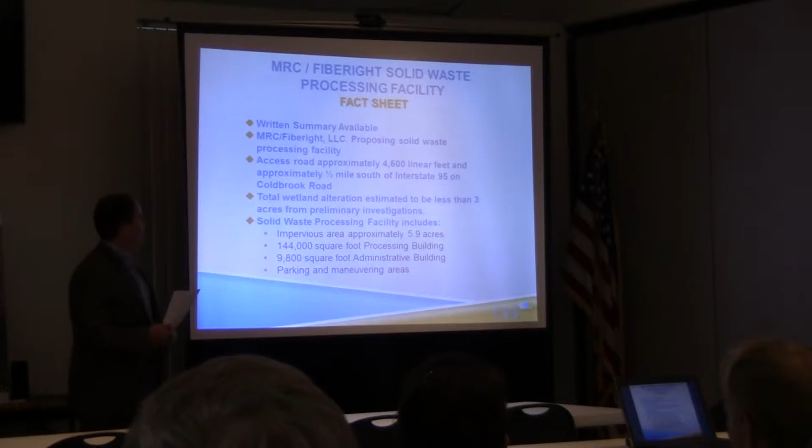As I said, this is a proposed solid waste processing facility. It's a co-applicant of the Municipal Review Committee and Fiberight LLC. There is a... jump ahead for a second, one more ahead.

As part of this project, there's a new access road off Coldbrook. I'll back up and put it in context. This is I-95, this is Coldbrook Road. The large Dysart's facility is on this side of the highway, H.O. Bouchard is on this side. This proposed new road uses an existing gravel road across some fields into this area, which has been zoned industrial by the town of Hampden.

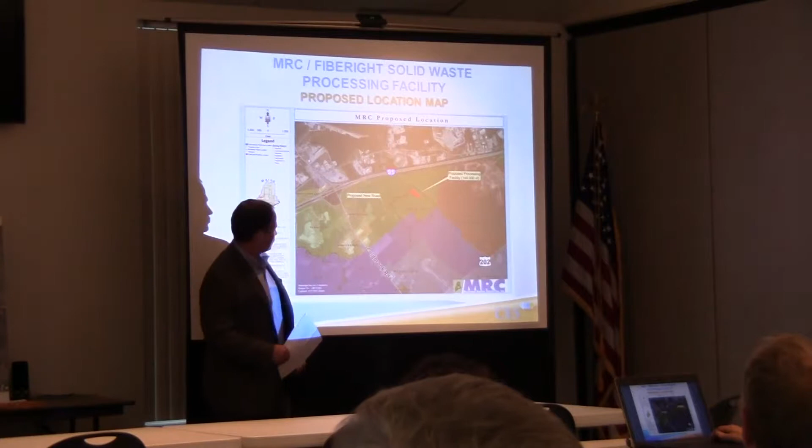The town has a comprehensive plan where they've mapped out land uses. You can see the green zone here, that's industrial. The yellow is an interchange with the highway. The purple color is a rural zone, and there's a residential zone down here. There's also another industrial zone - this is an Ameco park over here.

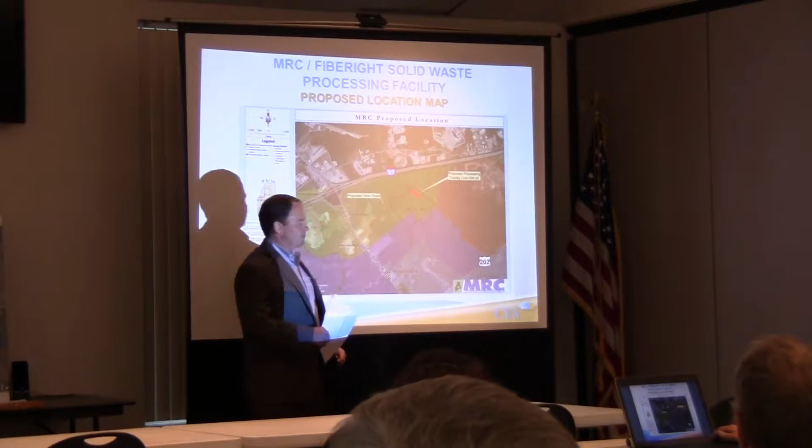So this road is about 4,600 linear feet in length, and again, it's going to be using the existing gravel road. There's a proposed facility - a building location that's 144,000 square feet. If you can back up 2 slides - that new road is about a half mile from the interchange of the highway.

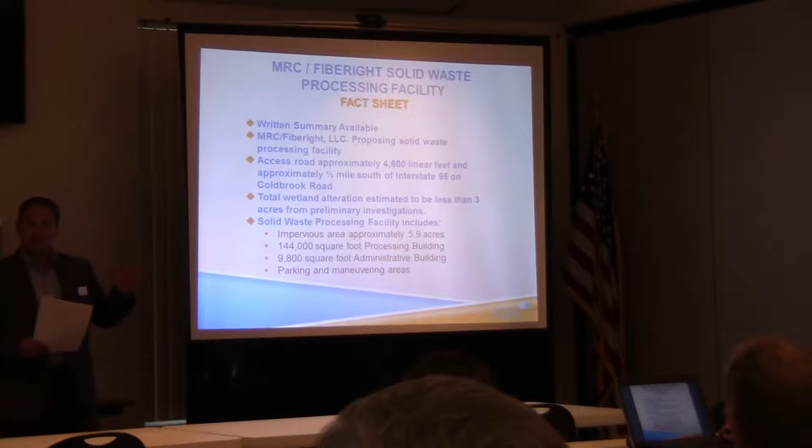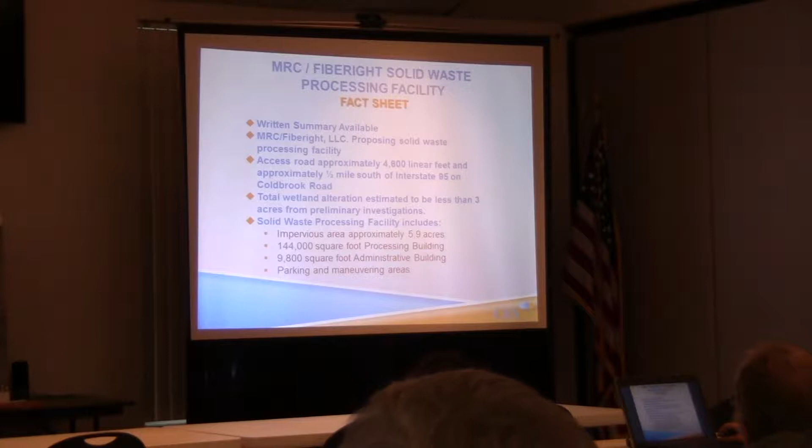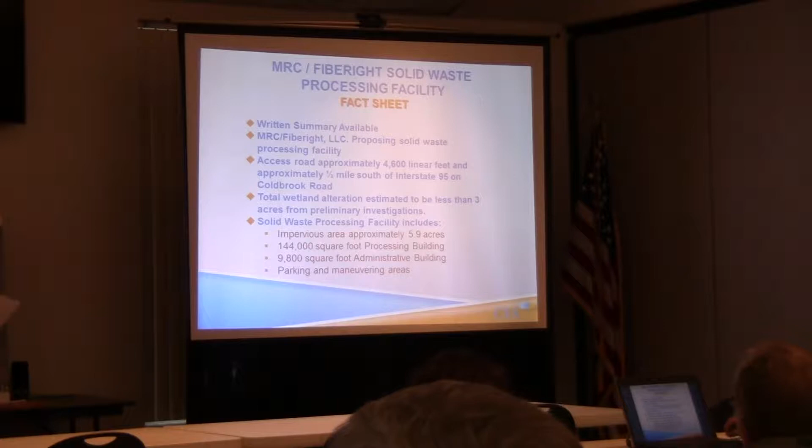The total wetland alteration we're looking at for this project is somewhat less than 3 acres. Through development projects, we're required to avoid and minimize as much as we can, and you'll see on the site plan we've done a good job of avoiding and minimizing those impacts.

The total impervious area associated with this facility is 5.9 acres. As I mentioned, the building footprint is 144,000 square feet. There's another associated administrative building attached, that's 9,800 square feet, and there's also the parking and maneuvering areas around the facility.

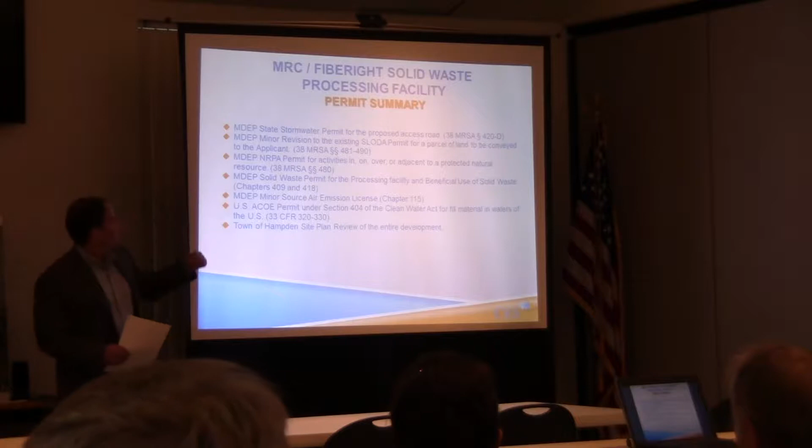The first permit on the list is for the proposed road, and associated facilities with that road require what's called a Chapter 500 stormwater permit.

The second license on the list is the Site Location of Development Act, or SLODA, for transferring one property to another—the property owner transferring a piece of the property to the MRC.

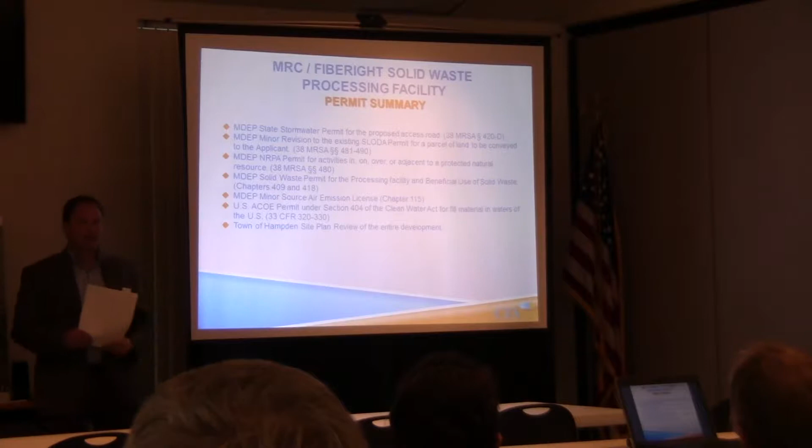The third permit is called the Natural Resource Protection Act, NRPA, which has to do with protected natural resources, wetlands, and vernal pools. This project is somewhat unique—we're doing that NRPA permit for the road, and separately for the processing facility.

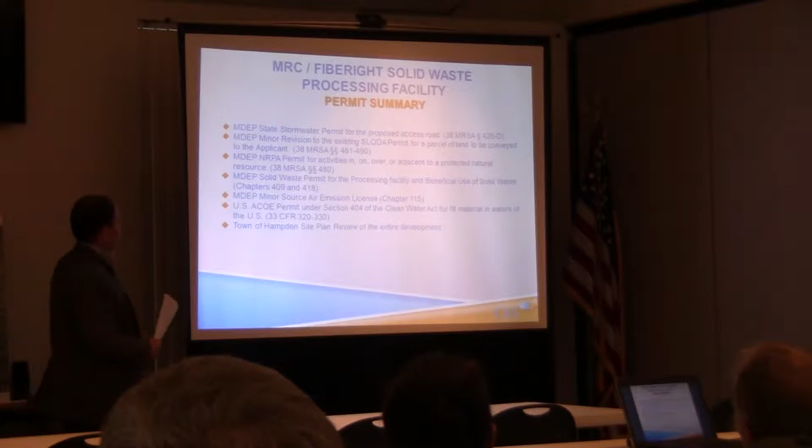The solid waste permits required are both under Chapter 409, which is processing, and Chapter 418, which is beneficial use. As we'll talk about the processing, the end products are going to be beneficially used. There's also going to be a minor source air emissions license required for the processing facility.

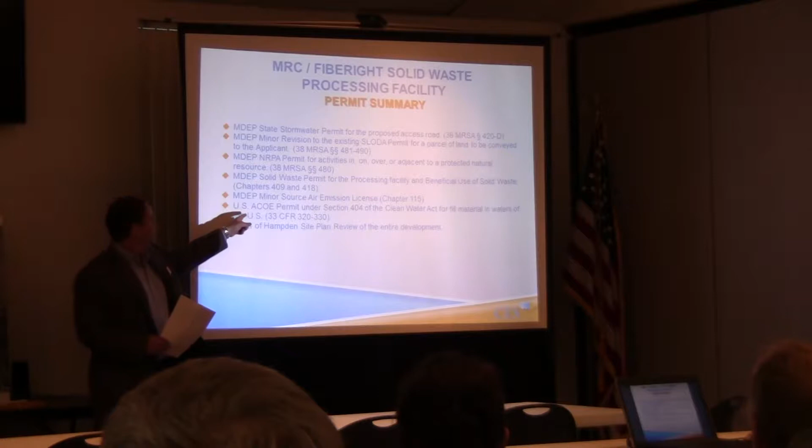There's also an Army Corps of Engineers permit under Section 404 of the Clean Water Act, another level of permitting we need for wetland impact. So it's really a federal and state duplicate there.

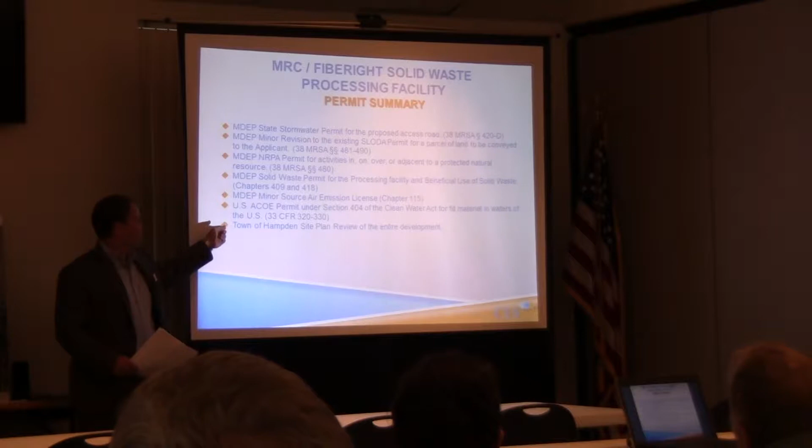And then the last one on the list is the town of Hampden will have a site plan review process for the entire project—both the site plan for the facility and the road will go through the town approval process. So as you can see, there are several permits.

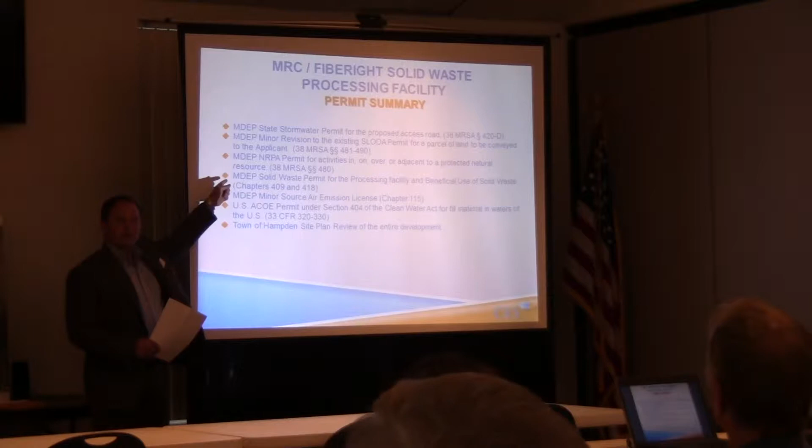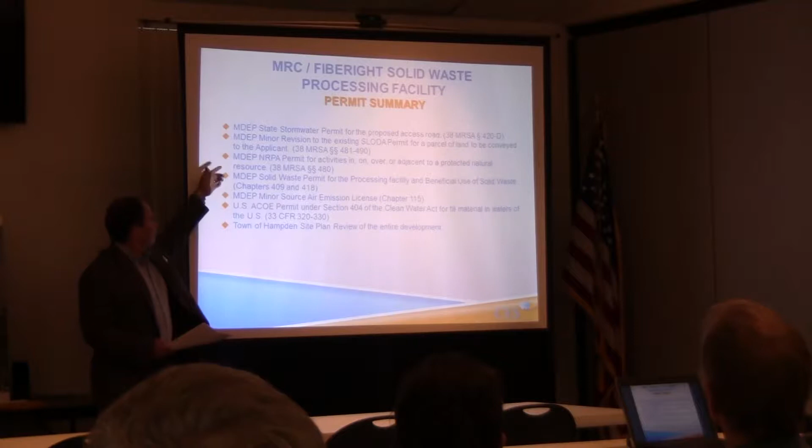The timing of these—the solid waste permits take the longest time for approval. The DEP, the Department of Environmental Protection, has a year's worth of review process on that type of permit. That's coming in to the DEP mid-month, this month, mid-May. All the other permits will follow about a month behind.

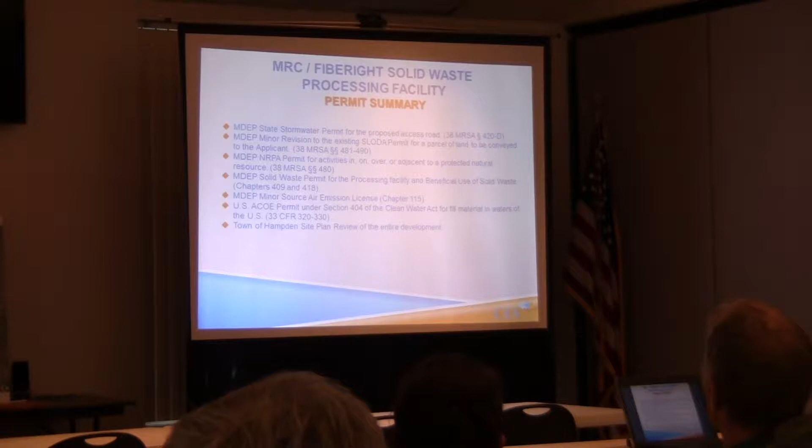In the state of Maine, we have vernal pool surveys that must be done in the spring, for certain frogs and salamander eggs—we inventory the project site before a project like this. That's happening right now, and we'll be submitting probably mid-June on everything else.

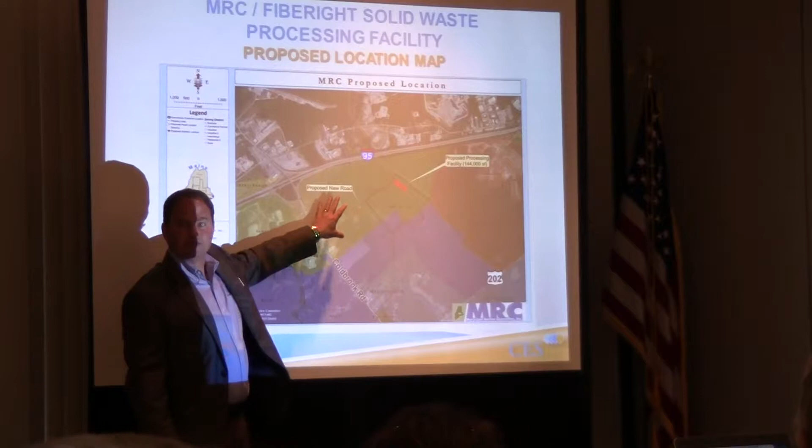This is the overall aerial photo of the area. As I mentioned, this area was targeted because the town is interested in a project like this. It's consistent with their comprehensive plan, and it is zoned industrial, which is what we need for this type of project.

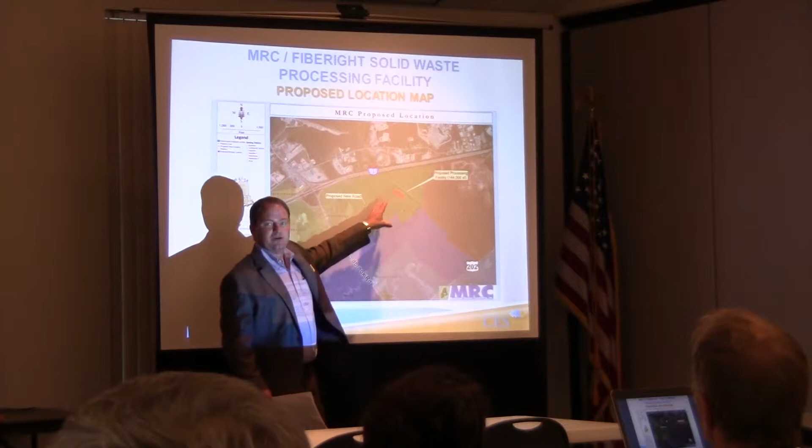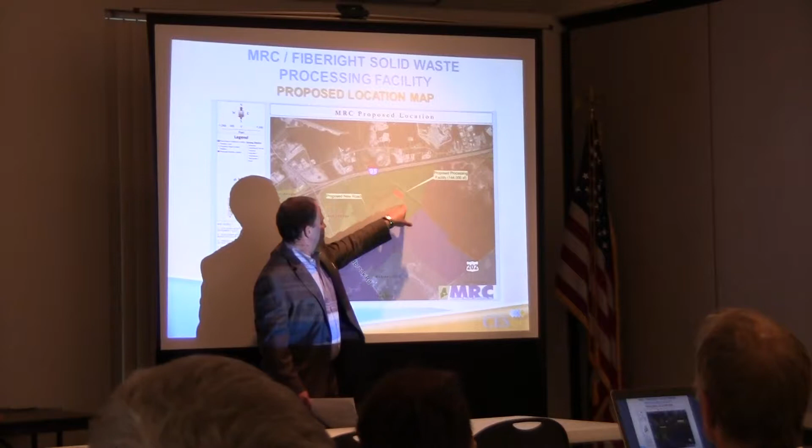This dark boundary is a proposed estimate of the property boundary for the facility. MRC is acquiring a lot more property than it needs. We'll zoom into the site plan in a little bit, but the property that's utilized is up in this corner.

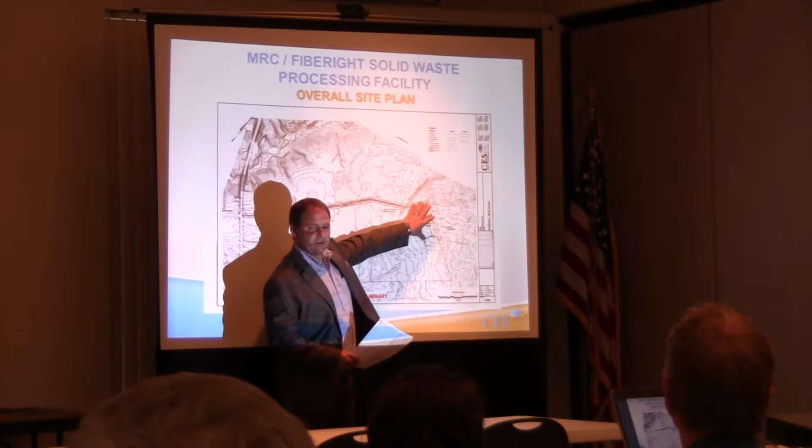Here's another overall site plan that shows the actual alignment of the road. It shows the wetlands in this dot matrix figure. You can see there's standing water out here, but as you approach the facility it's more of a forested wetland. This area up here is all upland, and we fit the facility in there the best we can to avoid and minimize wetlands.

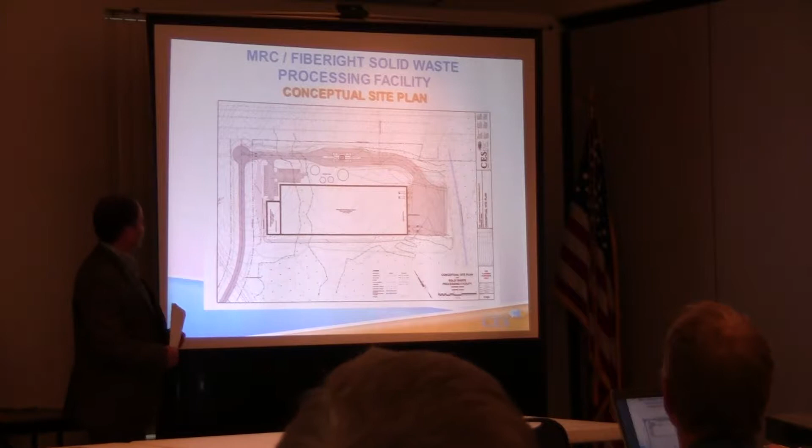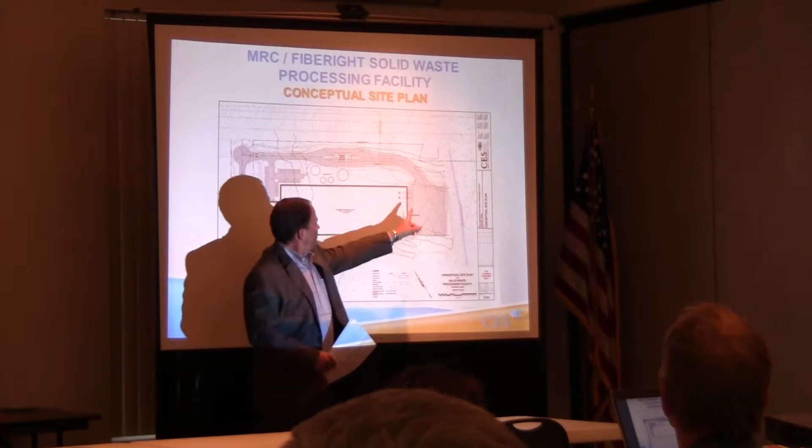Here's a zoom-in of the actual site, showing the new road extension and the driveway in with a scale and scale house. This is the front facing the new road. Trucks will drop off the waste inside the building, and there'll be a loading area on the other side of the facility for the exit. This will be the employee parking area and administrative section of the building.

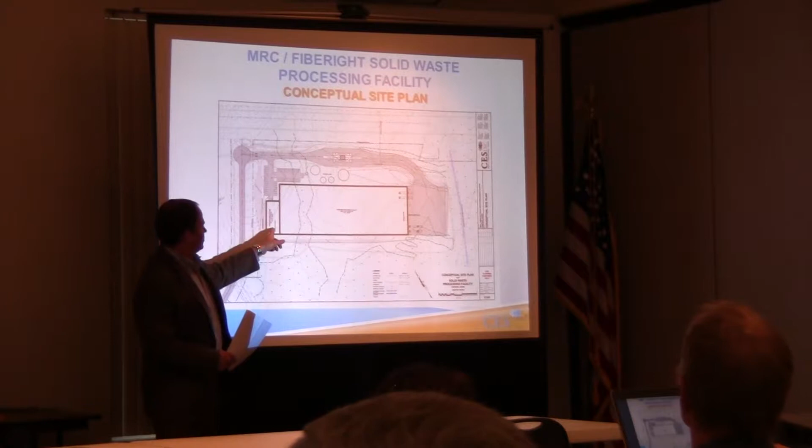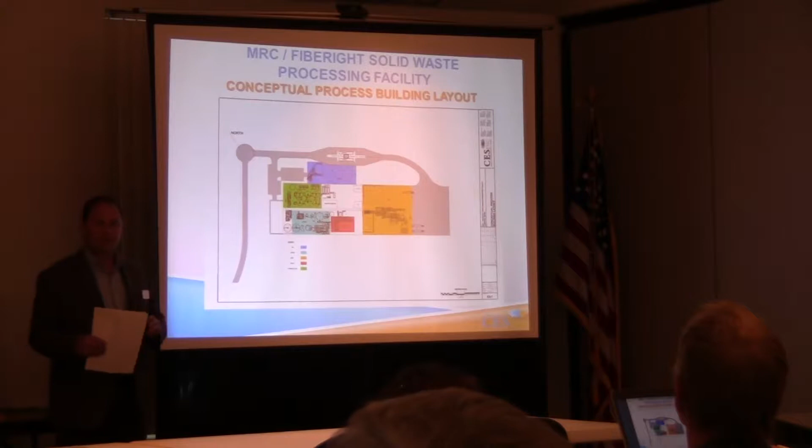This figure shows the different components inside the building. A lot of times at these meetings we don't get into the inside of buildings, because that's not necessarily part of the permitting process. But this is a processing facility that needs a solid waste license, so let me come over here to show it better.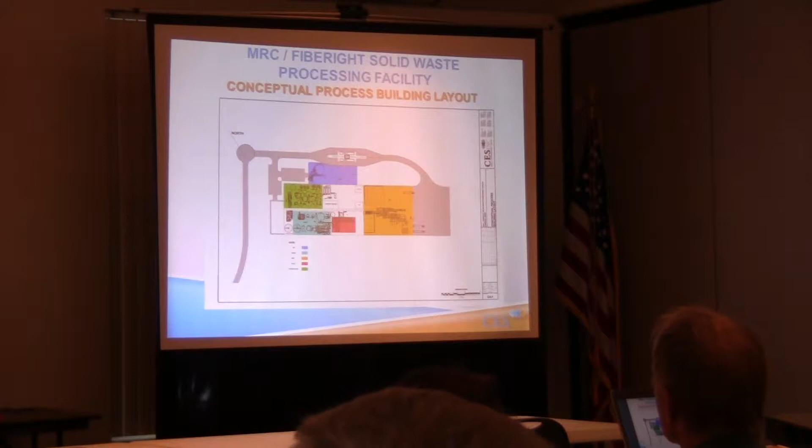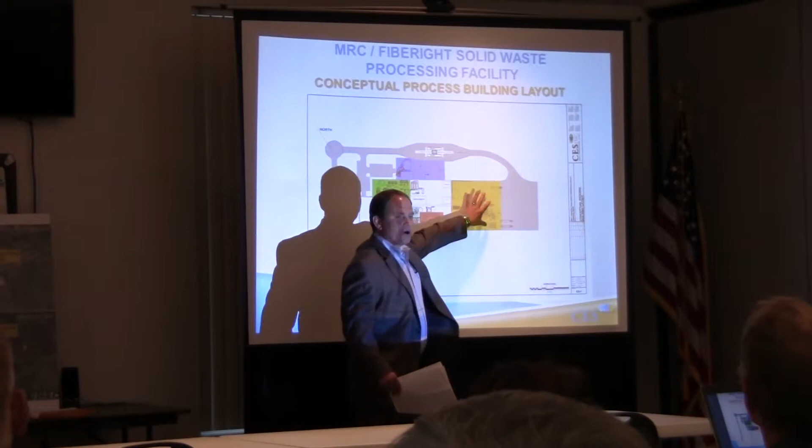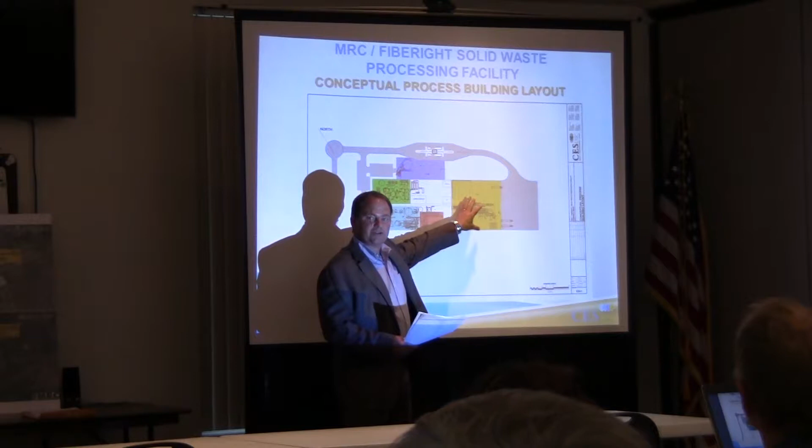The green section is referred to as the hydrolysis section. This light blue-green color is the washing area. The yellow is the material separating part of the facility. When the waste comes in, this is all the mechanical separation part, where waste is processed and divided into components for further processing. A lot of recyclables that don't make it through the local recycling process will be captured on the upfront part of this facility.

The pink area is the pulping process, and the darker blue is the anaerobic digestion tanks.

At the last public informational meeting, there were some residential concerns about prevailing wind direction. So this time I came with our research showing prevailing wind direction in this area, sourced from Bangor International Airport.

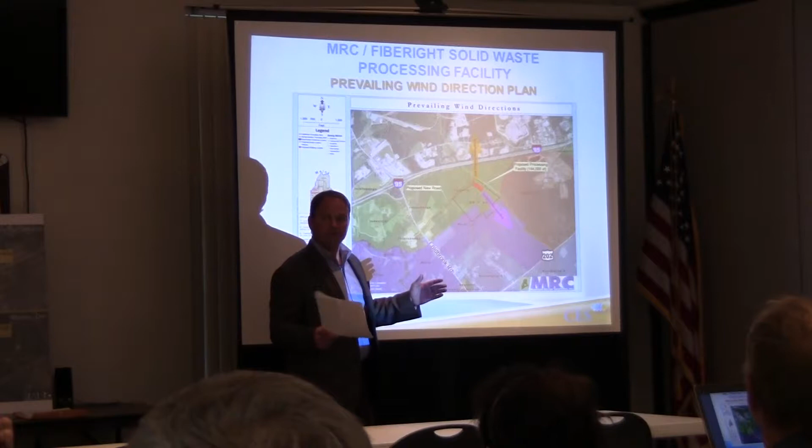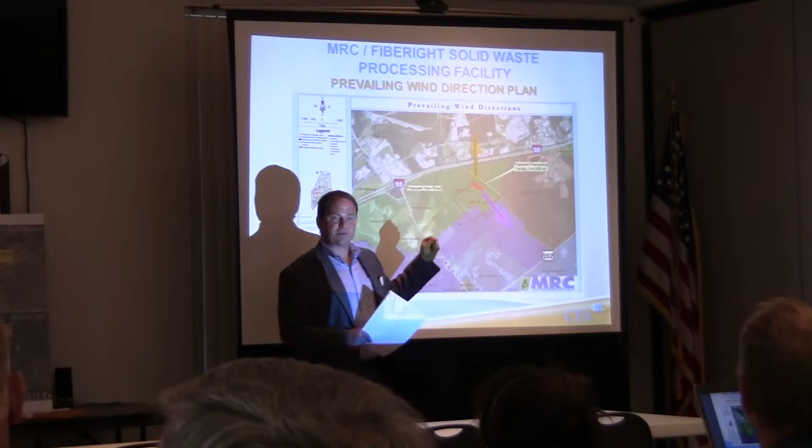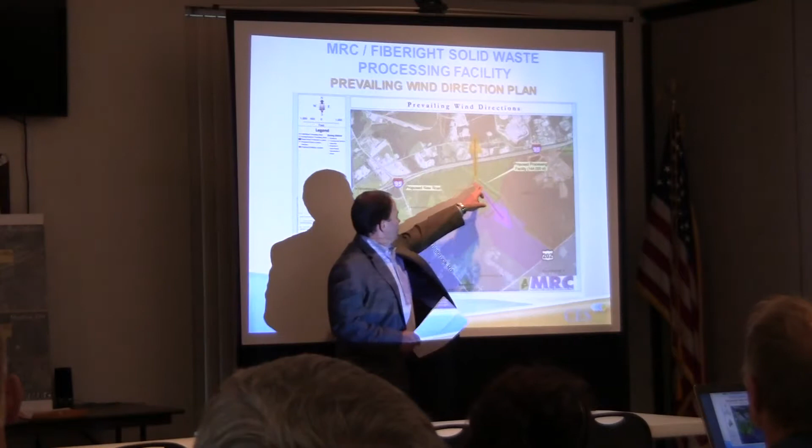There are actually two prevailing wind directions: a summertime and a wintertime one. This bluish-purple arrow comes from the northwest to the southeast, which is the fall-winter prevailing wind. The yellow arrow is the spring-summertime prevailing wind direction, coming from due south to north. This red box is the facility itself where all the waste is processed, and I think this may help address some concerns based on the prevailing wind direction.

All right, Kyle, do you want to talk about air emissions real quick?

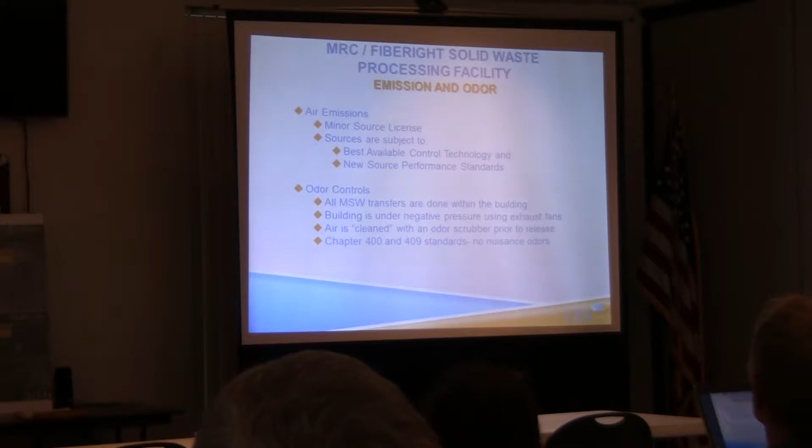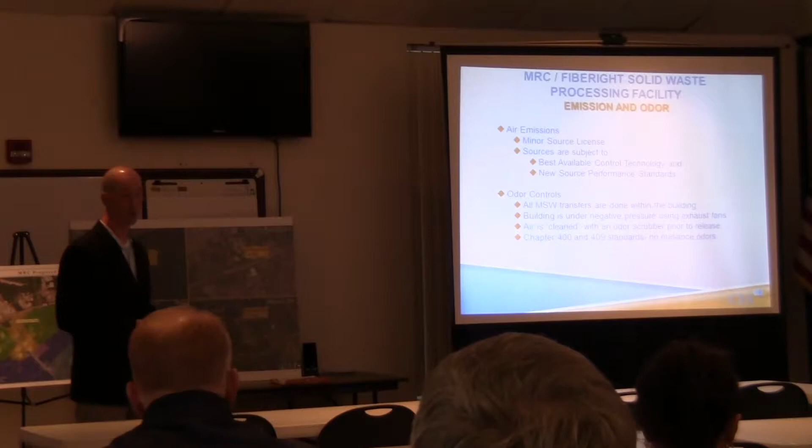Just to touch briefly on the air emissions and odor control for this project, the source will be licensed as a minor source, defined by DEP and their licensing rules. All sources are subject to DEP and EPA's best available control technologies, as well as new source performance standards. There's a ton of those, and we're still sorting out which ones we'll fall into.

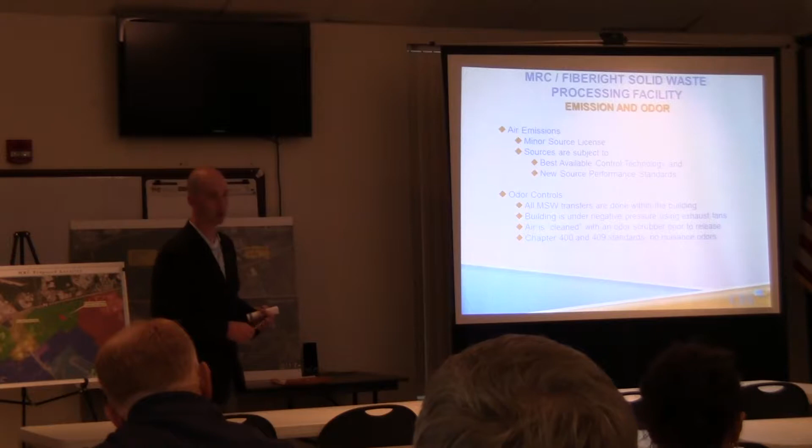Then the odor control, which I know is a big one. In this project, all transfer operations will happen indoors, and the building is maintained under negative pressure. We'll have a fan set up that draws a considerable amount of air into the facility. That air is then treated, going through a scrubber designed to take out the organic components of the gas to reduce any odor coming from the facility. The DEP will not license the facility under Chapter 400 or 409 if there is potential for generating odors, particularly nuisance odors.

And that's pretty brief, but yeah.

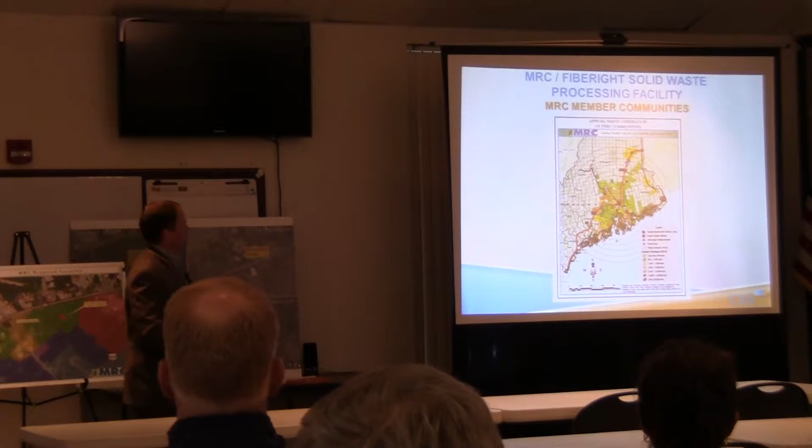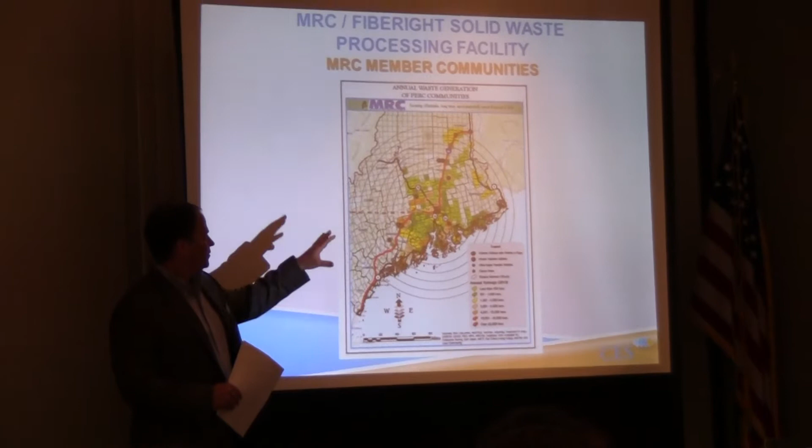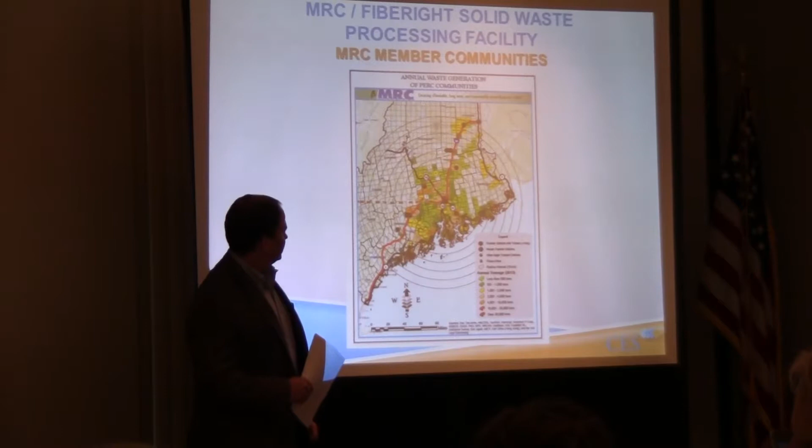This slide shows all of the communities that are part of the MRC that have brought waste to the PERC facility across the river, and those are the target communities for this project. As you can see, it ranges down to the coast, up into Aroostook County. There's 187 communities that currently bring waste to PERC.

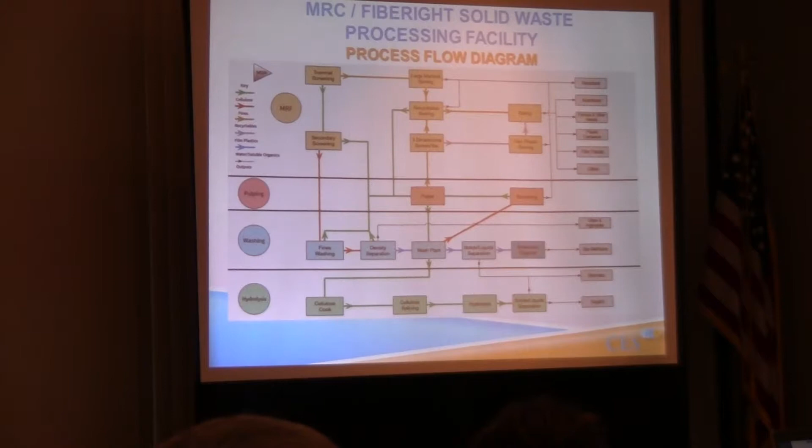So this gets into the more technical details of the processing facility inside the building. Depending on the questions you may have on the details of the processing, we'd like to set up a separate, more detailed conversation as an opportunity for people to ask questions about the processing facility.

So it's really a summary level that I'm giving now, and what we'd like to do is offer another meeting, May 19th at 7 o'clock, and we'll make sure we notify those who are interested. Maybe we can use our sign-in sheet to identify whether you'd like a separate invite to that meeting at the 19th at 7 o'clock. If you have detailed questions you'd like to submit ahead of time, we'd like to get those by the 13th of May.

Another idea for helping get input from communities that may have concerns: we'd like to maintain a frequently asked questions list and make that public, continually adding questions and concerns we receive, and hopefully publishing answers as a way to get input to our project. I think the MRC and Fiberight are very open to constructive input on their project.

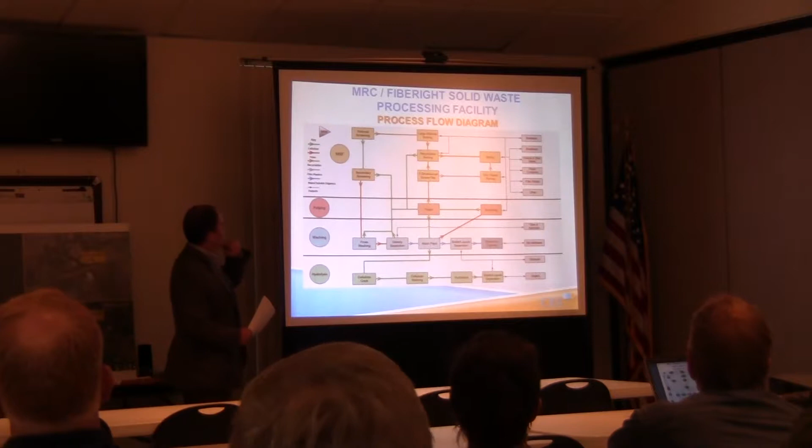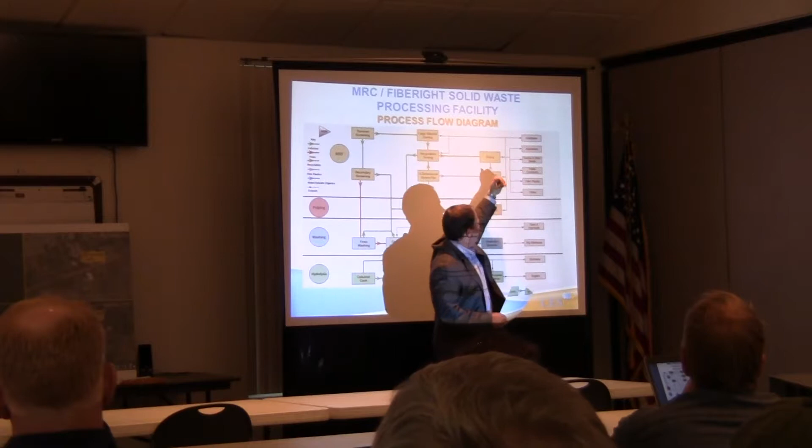So back up a second and go over the process flow diagram here. At the top, in this yellow or mustard color, is the mechanical separation of waste process. Then these are the end products over here that are recyclable: aluminum, residuals, ferrous and other metals, plastics, film plastic, and others that will be recycled.

Then for the material that proceeds to this second, pink colored section, there's a pulping process that processes the waste, then a washing process, and then the hydrolysis process. So it's a very technical process, and that's why we thought a separate discussion to get into all the technical details would be better.

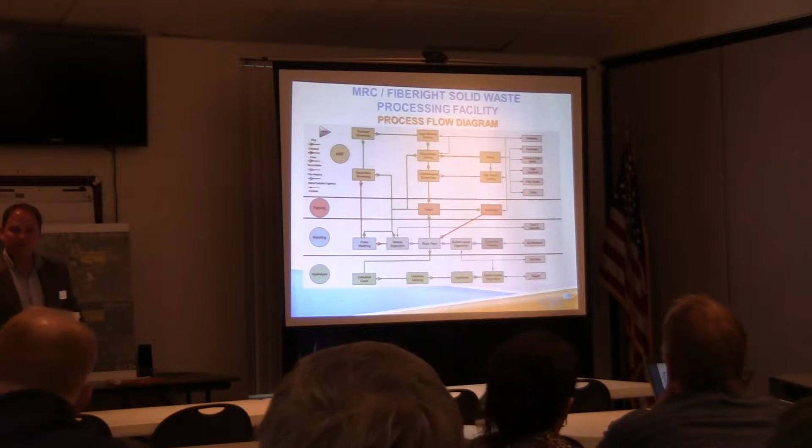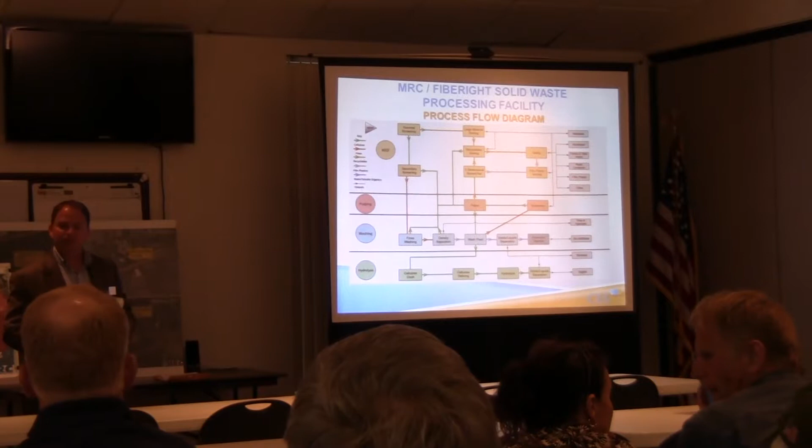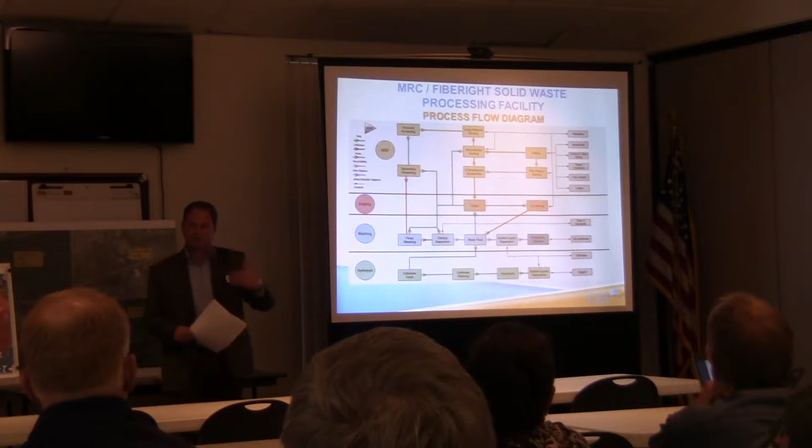This process has been submitted to the University of Maine Chemical Engineering Program. The professors at the university have done a peer review and concluded that all of these technologies exist and are proven technologies. That's one of the comforts the MRC has, that we're not proposing something totally new here. It's all proven technology.

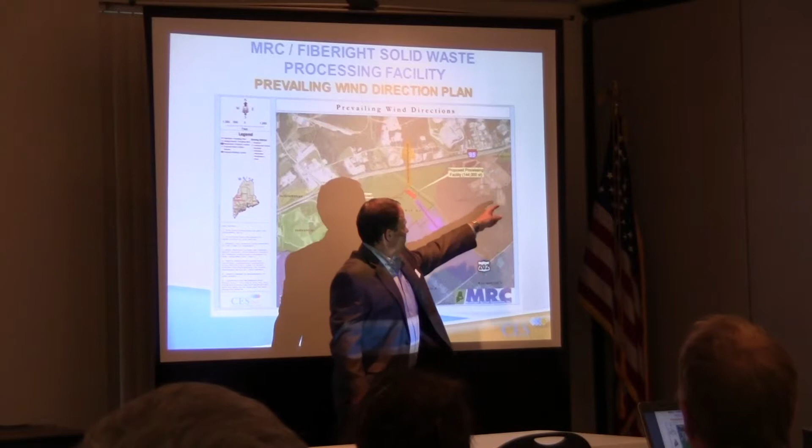Adequate provisions for utilities. As part of the project, there's no water and sewer on Coldbrook right now, so we evaluated whether or not to connect utilities down here or across over to here. The town's preference, as well as it just made more economical sense, to connect it through here, so we're also extending utilities out that way.

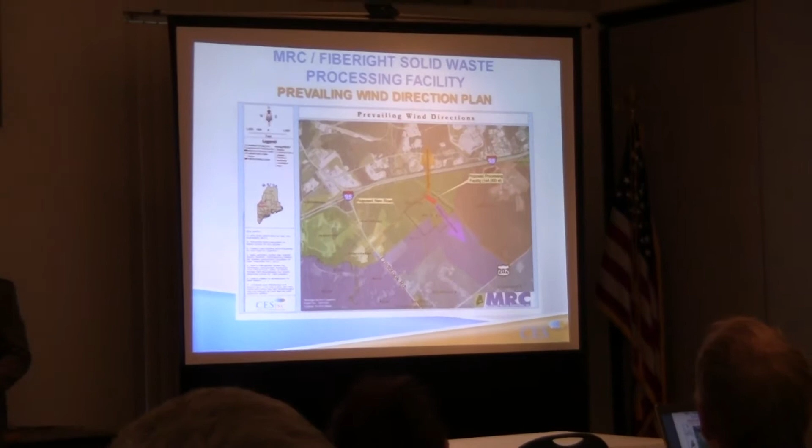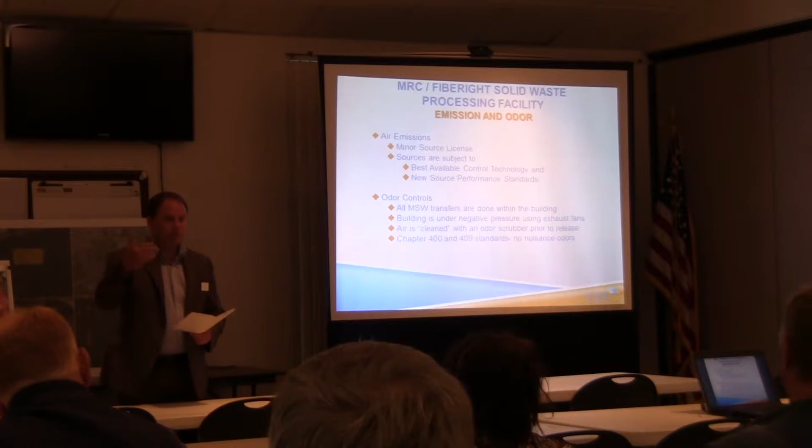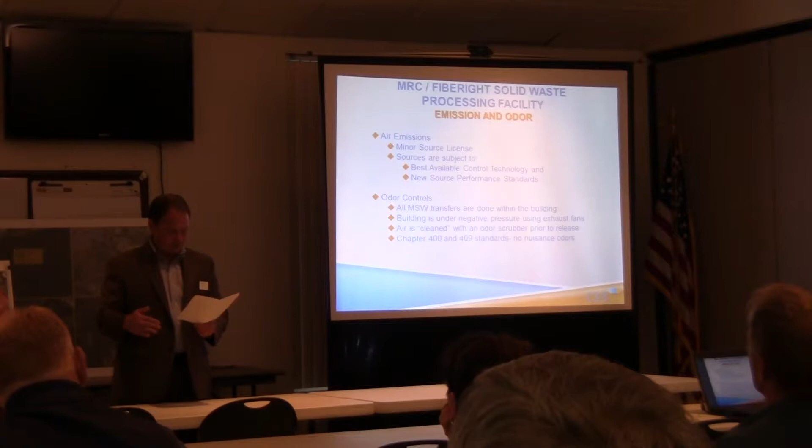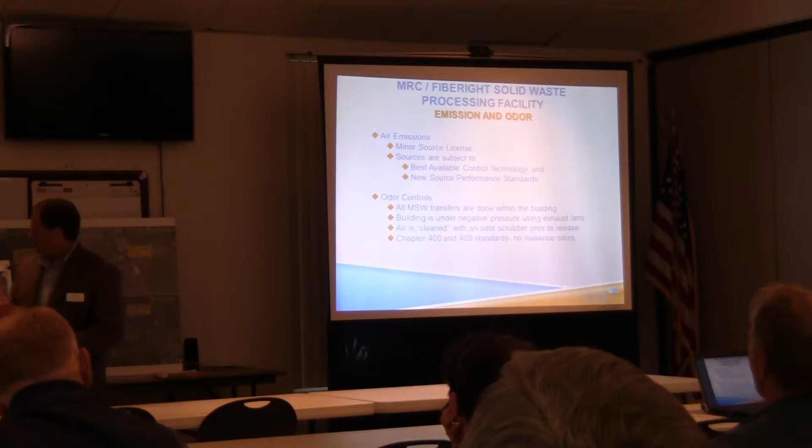There's also a solid waste management hierarchy. For those that paid attention in Maine, there's been a lot of discussion about following the hierarchy. There's a state statute that provides all of the priority on waste management in the state of Maine. You're supposed to evaluate the methods of waste handling and try to follow this hierarchy to the best you can. So reduction has the highest priority, then reuse, recycling, composting, processing, and finally land disposal as the last resort. We'll do a detailed evaluation of compliance with the hierarchy, but I'm going to summarize a bit here.

There's a lot of local recycling being done, a lot of reuse and reduction of waste locally. This type of project is not going to deter those local systems from succeeding. It's really just going to be another take at reducing and reusing waste. I talked about the front end of the mechanical separation and getting all the recyclables out the best we can.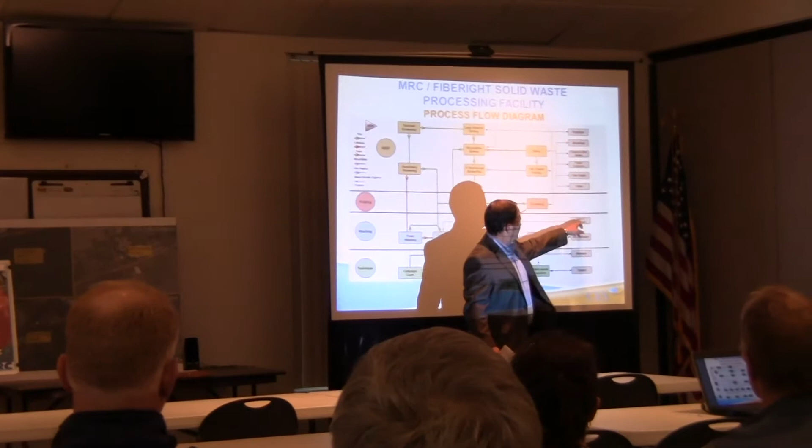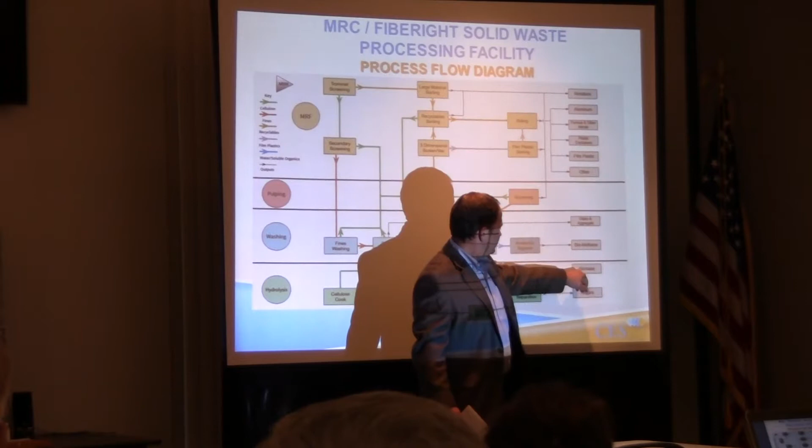And then we're going to be making products. Can you go back to that process flow? So again, there'll be some glass and aggregate that's captured that won't have to necessarily go to the landfill. There's going to be a gas component that's going to be put back into a gas pipeline, and then there's also biomass that can be used as fuel, and industrial sugars that can be marketed.

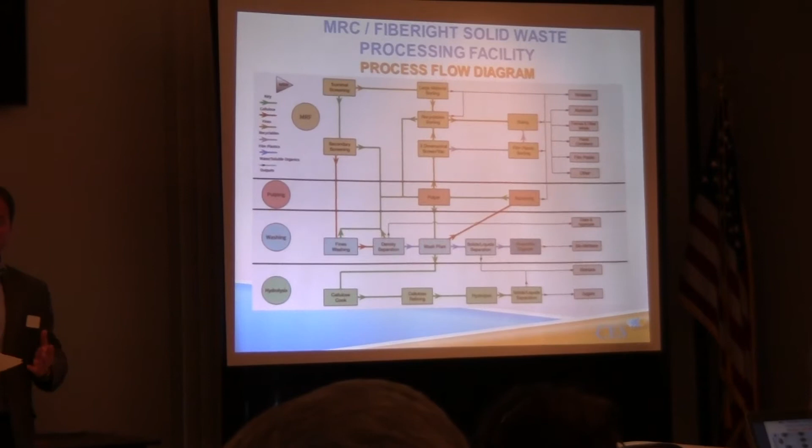So the overall success rate of this project is actually pretty incredible. If you've looked at different systems across the state, it's probably achieving the highest diversion rate from landfills out of any project that I know of, and it's going to achieve about 80% diversion. So we feel like the standards on the solid waste hierarchy are going to be achieved upfront more than other projects in the state.

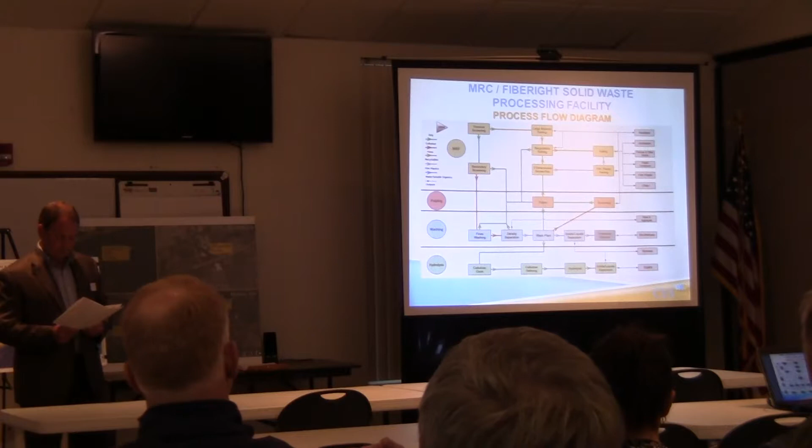The last little bit is this handout. It's double-sided, and it's a required component of this meeting that we just inform the public that this fact sheet exists, and there's all kinds of opportunities to provide input on the permitting process. This public informational meeting is mentioned on the first page as 2A. We're going to be filing the applications in the timelines that I mentioned.

If you're an interested person, there are many components. It starts on the first page at the bottom and then goes on to the second page, but there's several. You can submit comments directly to the DEP. I know that the MRC and Fiberight are very interested in getting your comments, so we want to maintain a set of frequently asked questions, share feedback, share comments, suggestions. There is a provision in here to ask for a hearing to the DEP. There isn't an automatic hearing for a project like this, but you can request that.

I had mentioned you can submit comments directly to the department, and then there'll be a draft order that will be available to the public. I think that concludes it. Is there anything, Greg, that you wanted to add before questions? No, I think it's time to jump into Q&A.

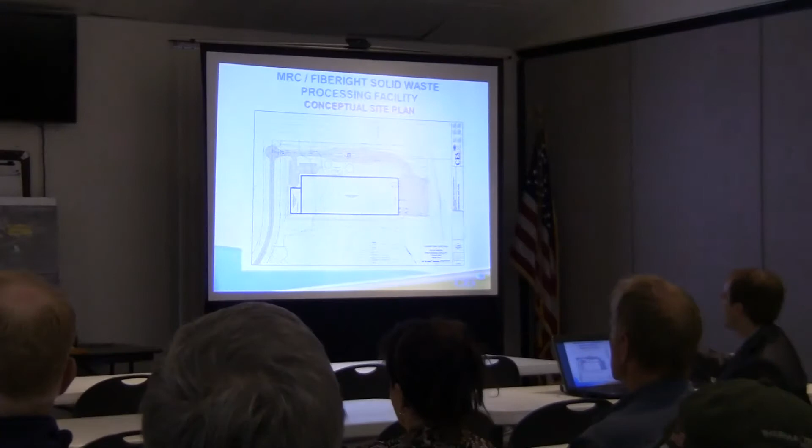Any other questions? The building design, so the trucks go in on the top, around the yellow, to the right of the yellow. Then they turn around in the building? No, they go into the tipping floor here. The different types of trucks will unload and then pull back out. So this area is the unloading area inside the building.

You wonder, do they drive out versus back out? Yes, that'd be drive out. So they back in and drive out. They pull into the building, back into the building.

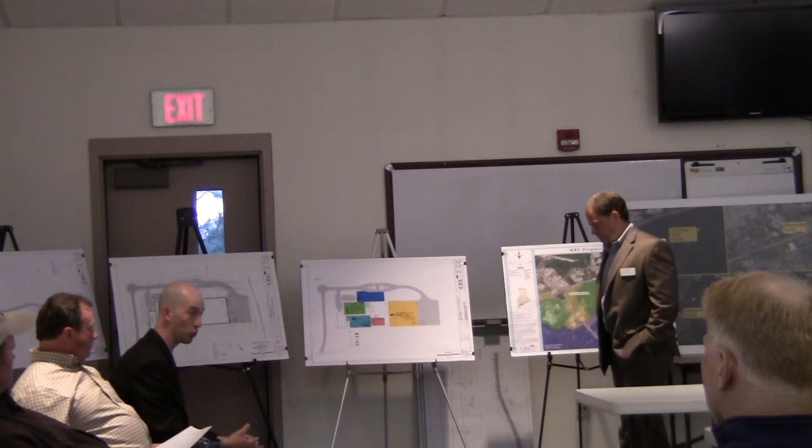And so it's supposed to be totally self-contained, right? So how do you keep it self-contained when you have vehicles going in and out? What they're going to have set up is, under normal conditions, when the doors are closed and the building sealed, they have a single exhaust fan running. The doors are interlocked to a second fan, so as soon as the door is open, another fan kicks on, which increases the amount of passive air moving through. Anything that's inside the building is going to stay inside the building.

In fact, some of the things around the outside, as far as air goes, will be open, creating a vacuum so the airflow across an open door is only inward. So the trucks, when they go in, they're all the way in, not halfway in and halfway out. Something closes behind them.

Hey Dennis, first, thank you both for coming and allowing us to ask questions. So we all have a lot of questions, I'll just ask one. You mentioned odor and such, but I didn't hear anything mentioned about decibels. So my question is, what is the decibel level currently at the PERC plant existing in Orrington, and what is the decibel level of this proposed facility?

Let me talk about the proposed facility, and then I guess Greg can address the PERC plant question, because I don't know the answer to that. The decibel level... plant personnel might not, I don't recollect it.

But the PERC plant is literally spinning a turbine, right? Yes, it's generating electricity. Because I can hear that at 109 Kenneth Road at night, and I'm across the river. But this doesn't have a turbine. PERC does. Right, so with that being said, any processing facility has noise associated with it.

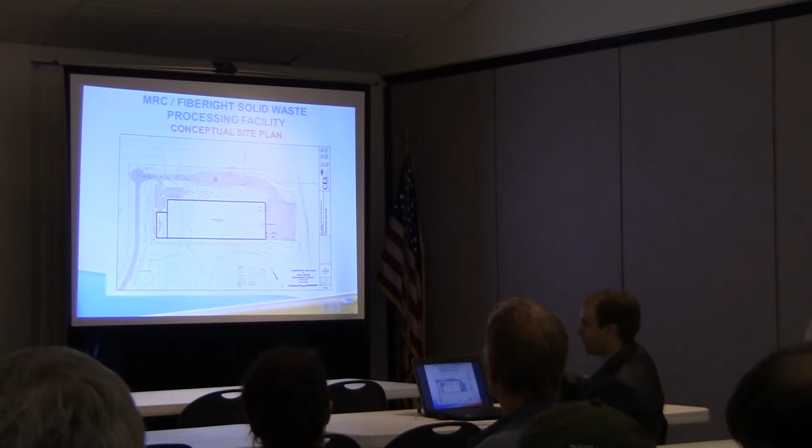Can you give a comparable, what's a comparable 70 decibel noise? 70 decibels would be a fairly loud conversation between two people close together. The other thing to take into account is the separation and the wooded area around this facility. As a rule, for every 100 feet of wooded area you have, you lose between 5 and 8 decibels of noise from that source. We've got over 3,500 feet between there and the closest residential area, and it's all wooded.

Any other questions? Your last meeting, you mentioned how many trucks are going to be going through there a day. I didn't write it down.

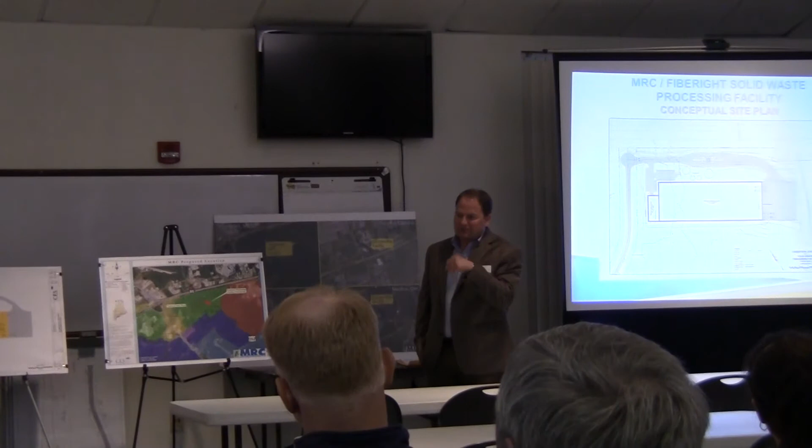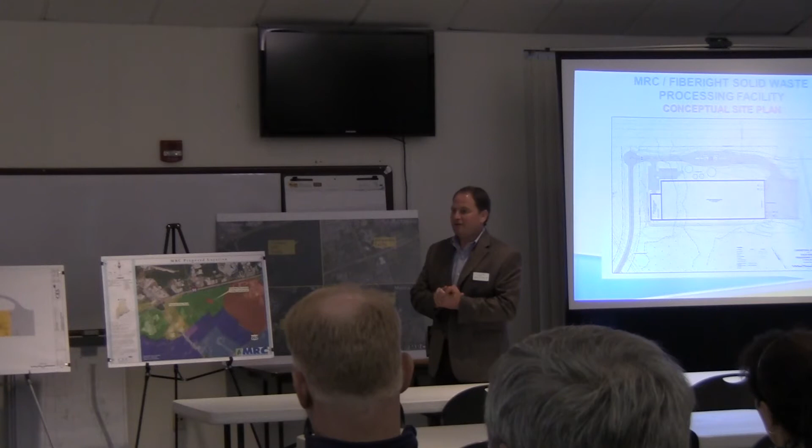I think we didn't mention the number of trucks, but someone in the audience did some quick math and tried to calculate it, but it wasn't straightforward because there's 3 different sizes of trucks. So we're looking at 60 trucks per day delivering waste, and about 4 trucks per day removing residuals. They're loading residuals, so we're talking about 65 trucks a day.

And then the employee traffic, we're required to look at peak hour, and the peak is going to be the employees, so when changing shifts. The good news is all the jobs associated with it. Is it a 24-hour operation? I think he said it was. Well, it operates 24/7, but the processing will be done on 2 shifts.

Processing will be 2/3 of the time, no processing during 3rd shift, so no trucks coming in during 3rd shift, very soon. All the trucks will stop coming well before the 3rd shift started. I don't know that we've settled the final hours of operation, but if we roughly follow what has always worked around this area, I think we'll be looking at roughly 6 to 6, about 5.5 days a week. Maybe that'll move a slight bit, but that's the neighborhood we're in right now.

Any other questions? So you mentioned that you're going to install a new water line that's going to service the facility. Yes. So my question is, with this new facility, do we have current capacity to service it with water? And will you need a pumping station to boost it, and if so, where would that be located?

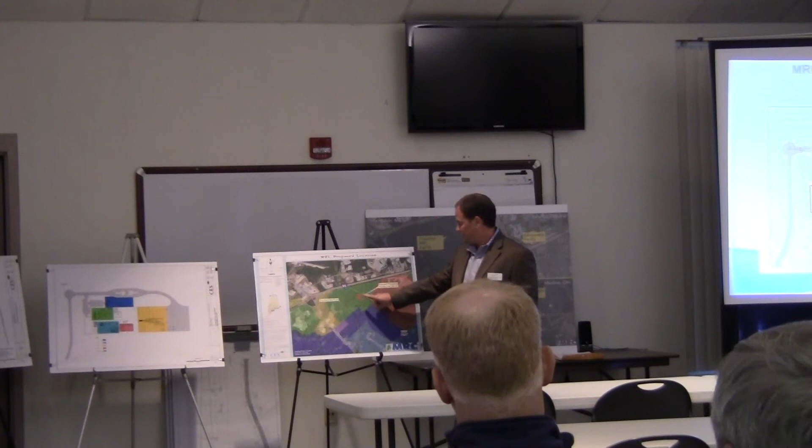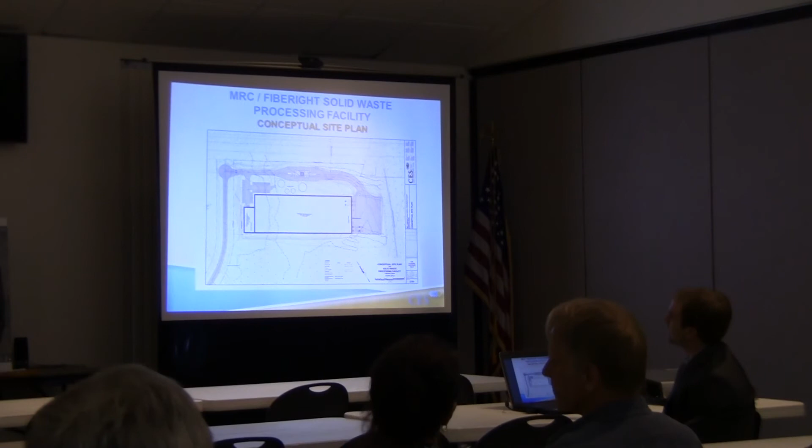Question about how to get the water from here — is there a need for a pump station for water? Good question. There's a tank currently in Hamel Park there. We've got to ask, another guy's the right guy to ask. But we don't see anything hard about getting water to this site.

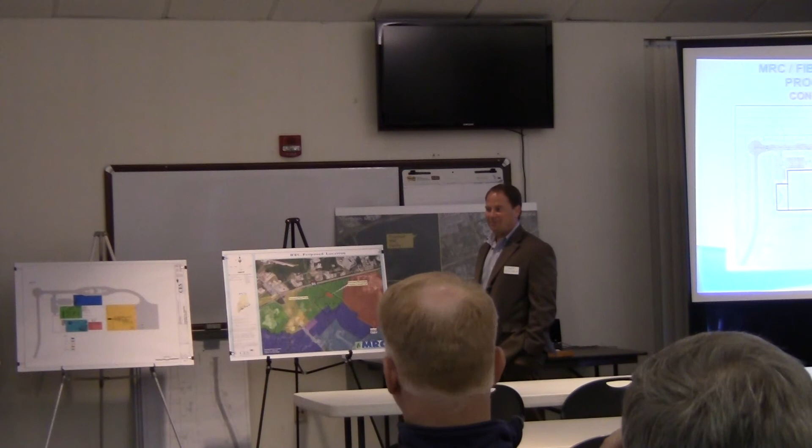As a follow-up, you mentioned you're going to bring in sewer and water, which would give access to potential commercial lots, which pay taxes, which is a good thing for all of us. So selfishly speaking, that's on the ITS 82 snowmobile trail currently, so I'll ask again if MRC and Fiberight can make sure they make a provision that the ITS trail doesn't get shut down for the snowmobile industry. Greg has already affirmed that that would be the case — we've discussed that with the authority.

Last question — in the future, could more communities sign on to this, and 20 years down the road could you double what's going in there? Yes, we did talk a lot about the capacity of the facility, but there's a pledge that there's no out-of-state waste — the MRC communities are not interested in bringing out-of-state waste.

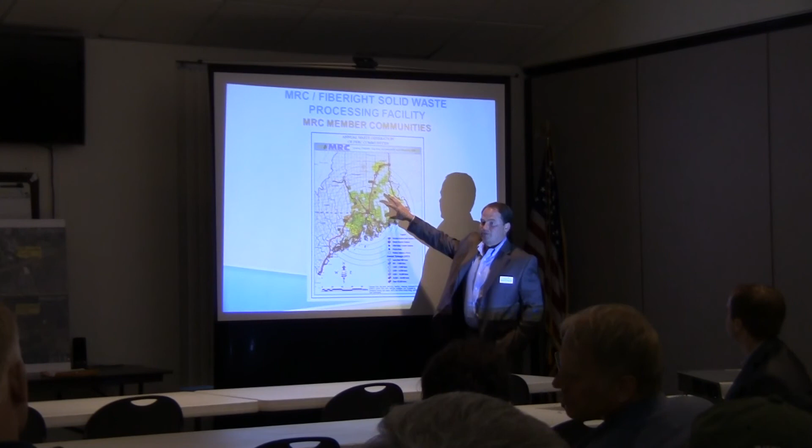But can you bring up the MRC map? Greg, you can jump in after I'm done here. If it makes sense for communities to utilize this facility, from areas that don't currently utilize them, I think the MRC and Fiberight are open for business — there would be capacity available to them.

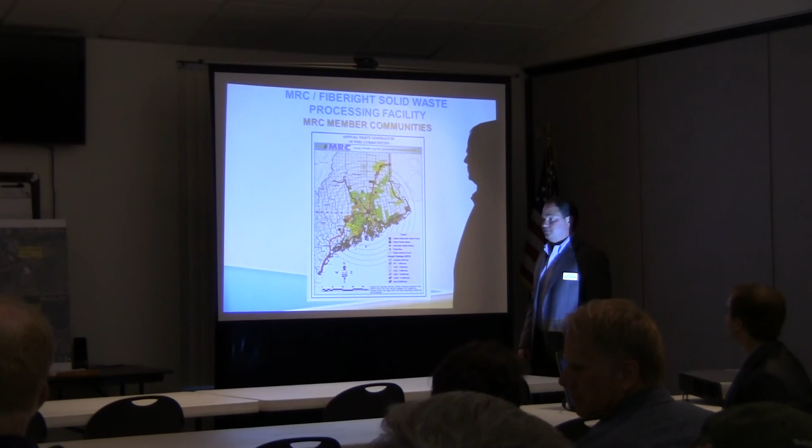Well, right, and the goal of the MRC board since the outset has been simply to design a replacement solution for the communities in this region. Is there a possibility, I suppose, years down the road, that a few others may sign on? I suppose that's a possibility, but we have design parameters set up around the development of this facility — it's a design that's not a limit, but approximate to the needs of our existing region. So I would expect growth potential to be minimal, if any, over time.

Any other questions, Sophie? Not a question, but more a follow-up, just to remind folks that transportation-wise, we'll be in a similar location, price-wise.